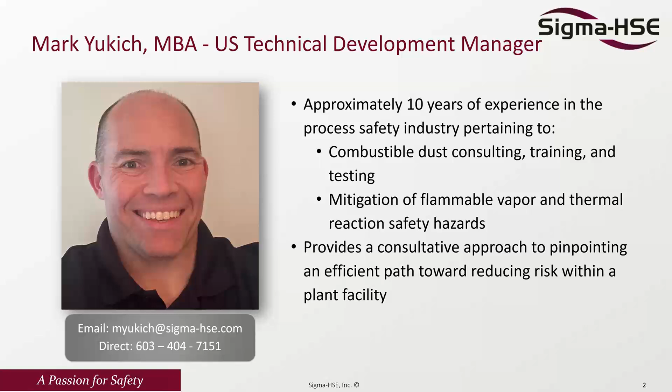Sigma-HSE is a global engineering firm with technical experts supporting companies around the world by providing actionable solutions to protect, enhance, and optimize their process. Our goal is to allow your team to focus on what really matters: protection for your people, business, workplace, and the environment. In this webinar, we will discuss Quantitative Risk Assessment, or QRA, Hazards, Risk and Safety, Chemical Handling. This webinar will explore core principles of QRA and risk evaluation, identifying chemical hazards, predicting accident likelihood and consequences, and integrating QRA into project planning and compliance.

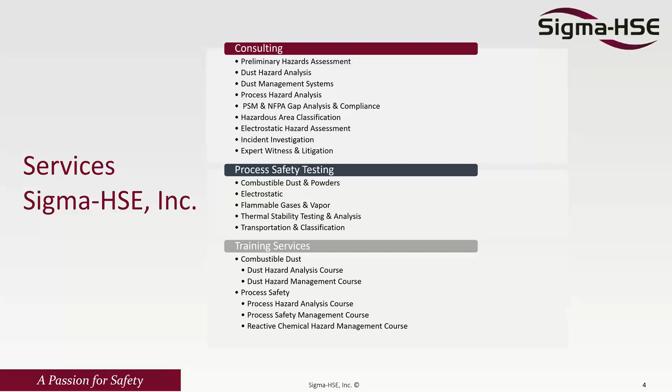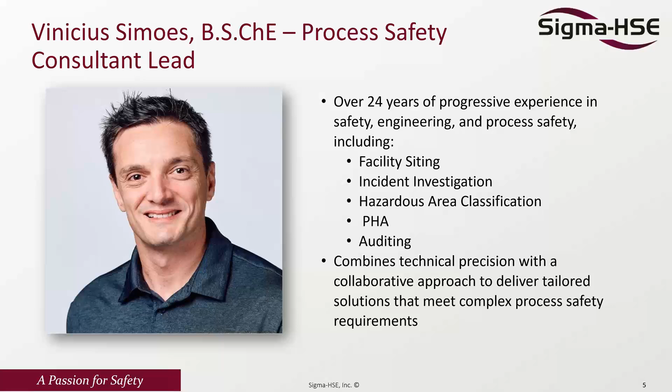Thanks a lot, Mark. I have just a quick spiel on myself. I know some of you guys have already attended other webinars that I have presented, but I have over 24 years of experience in safety, basically just out of college and went straight to process safety. Those include facility siting, incident investigation, hazard classification, PHAs, auditing, and has been my bread and butter, basically consequence modeling and QRA. So we're gonna talk a lot about a subject that I'm very dear to my heart, and we'll just discuss a little bit about it.

So the idea of today's webinar is to do a quick introduction to QRA in a nutshell. That's what we're looking for. So we're gonna talk about risk versus consequence approach, why one over the other. We're gonna talk about typical risk criteria, general methodology for QRA, and then we're gonna talk about typical QRA requirements.

What do we do? When do we do this? We do it to determine the risk to people, risk to your asset itself. So you can look into fire and explosion risk assessment, and then we look into risk reduction measurements, or basically ALARP demonstration. Other requirements that come out of the risk base, we can talk about this in other webinars, we're going to talk this further. It's escape and evacuation risk assessments, emergency system survivability analysis, risk-based layout optimization, and so forth. So this is basically what we're going to cover over the next 30 minutes or so.

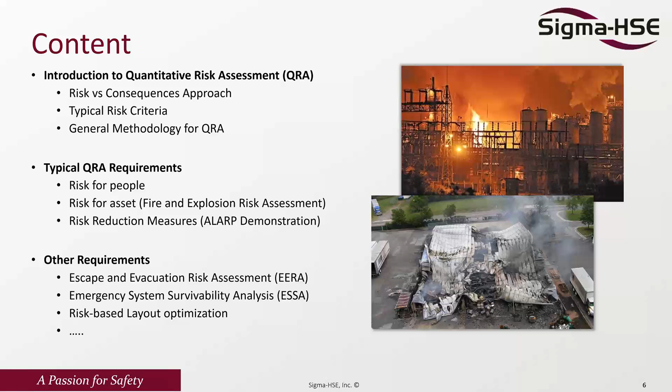So the first question is why risk? Why do we move from consequence to risk? The consequence itself can only tell you part of the story. Think about this: if I take the worst case in my facility, it's going to make a massive impact, and it's going to be extremely impactful to my environment, to the people around it, and to my asset. The problem that creates is that the likelihood of that becomes very small. So it's that one-in-a-lifetime kind of event. So we rarely design based on the worst case, right? So you look even like for buildings and so forth, there is an acceptance in there, and that's what we're going to talk about, because very rarely does this dominate the risk.

When we take the consequence approach for what the maximum credible event could be, we're already taking a bit of that risk into account. So if we mitigate our assessment based on the worst cases, we're going to end up with a very heavy expenditure. It may not be effective because when we look into the whole scheme of things, if I just take the worst case, it may not be the one driving my risk, so that may not be effective.

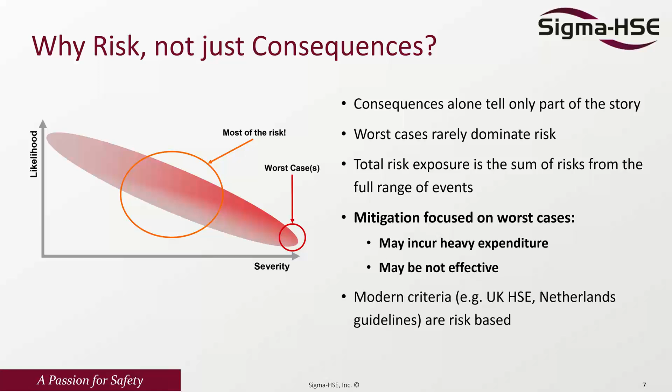So we're going to talk about modern risk criteria. A lot of countries, like the UK with the HSE, the Netherlands, Switzerland, Singapore, are driven by risk criteria, not consequence based. In the US, for example, we don't have a specific requirement to do QRAs, but OSHA requires us to do a siting assessment, and that siting can be done risk-based, which is essentially a QRA, or consequence-based. So these are things you may not have been explicitly asked to do as a QRA, but it may be something we're already using and doing.

The information I'm going to get out of a QRA is basically a location-specific individual risk per annum, those two being individual risks, basically assessing the risk to a person or a group of persons when we're talking about IRPA. And then we're talking about societal risk, or the risk for the whole society around that asset, which relates to the potential loss of life. We express societal risk in terms of an FN curve, or frequency versus the number of fatalities.

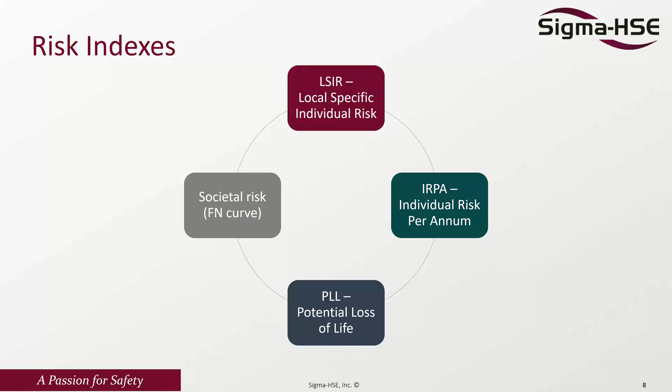So when we're talking about typical risk criteria or escalation criteria, we're talking about risk to workers, risk to others (in this case the public), and the risk of escalation - looking into one unit in my plant impacting another unit. There are different ways we address this. When we're talking about risk to workers, we accept a slightly heavier risk than when we're looking at risk to the public.

The risk to workers, mostly around the world, if you are at 10 to the -3, or once every 1,000 years, it's not acceptable. When we're talking about 10 to the -3 to 10 to the -6, or basically every 1,000 years to every million years, you're in the ALARP region, or as low as reasonably practicable - we'll talk about this a bit later. But when you're lower than 10 to the -6, worldwide this tends to be a broadly accepted region.

When you think about the risk to the public, it's a little different - it depends on the land use planning. Countries will have specific risk criteria for land use planning, for where we're planning to build a facility. They cannot be higher than 10 to the minus 4 - we're basically accepting that they cannot be higher than that. And then for residential areas, they cannot be placed within the 10 to the minus 6 range.

There is a different criteria for existing facilities versus new facilities. If you're putting in a new facility, a lot of the criteria are going to be a bit more strict because you already have the public around. But a lot of facilities were built in the 50s and 60s where there was nothing around, and then houses and buildings started popping up nearby. Then they have a slightly different criteria.

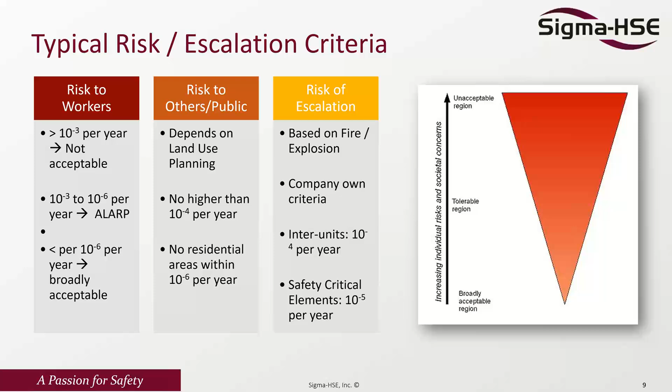So we're talking about different countries and different things - different countries will have different risk criteria.

When we're talking about the UK, for example, we're talking about individual risk and possibility of F-N curve. There are other criteria besides individual risk, like ALARP demonstrations and so on. So when we're talking about land use planning, yes, maybe individual risk criteria, but I'm looking mostly into societal risk, because for land use planning I'm looking at building around. So that's where the societal risk is a requirement.

In the Netherlands, individual risk is a must, and the FN curve is optional. When we're talking about Belgium, we're talking about both individual and FN curve. Same thing for Hong Kong. Three states in Brazil use both. And if your FN curve meets the criteria, then you're flexible on the individual risk — you may present it or you may not.

Singapore is only individual risk, and a lot of the things are related to consequence-based, so you do consequence-driven analysis. And then you can see other countries listed there.

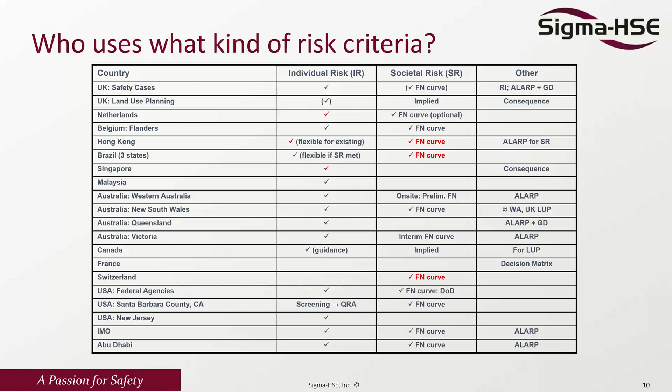In the US, where I'm based, federal agencies do not necessarily require something. Santa Barbara County is different — they do have a screening QRA for that. But the other ones tend to be, when we're talking about facility siting for example, we can use a risk-based facility siting, and there is a criteria that we present or results that we present to satisfy that. So that, in a nutshell, is some of the criteria around the world.

We can talk about 2 or 3 bands in terms of societal risk or individual risk criteria. Usually when we have 3 bands, we have an acceptable, an ALARP region, and a non-acceptable. When we have 2 bands, we usually have the ALARP region and the unacceptable region. So if you look into different countries, they have different criteria and different applicabilities.

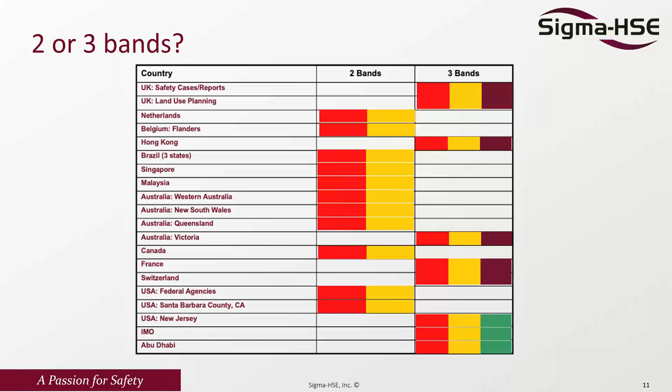Do we design things associated to that? No, we don't. So it becomes more like 10 to the minus 4, which is the likelihood that you have driving to the office, walking on the street, or having an accident at home. So when we say we're trying to do that kind of criteria of 10 to the minus 4, we're trying to keep it to something similar to the hazard of your day-to-day activities. That's basically how we got to 10 to the minus 4.

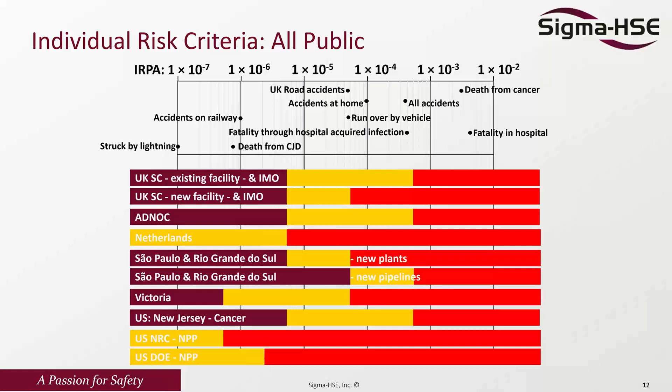And then you have the criteria for individual risk for different countries listed there. Some of them are more strict than others. The Netherlands tends to have a very strong criteria, as well as the US. Some of the others play a bigger role — there's a big ALARP demonstration region and so on, but for some others, even the ALARP is quite decent. So when we're talking about land use planning, then it changes.

Keep that in mind, back to what we did initially. What we're trying to do is have mostly an area that is unacceptable, which is the red. The yellow is the ALARP, and that purplish brownish color is where it's broadly acceptable. So that's basically what we're trying to do — this gives you an idea about individual risk and the criteria associated with it.

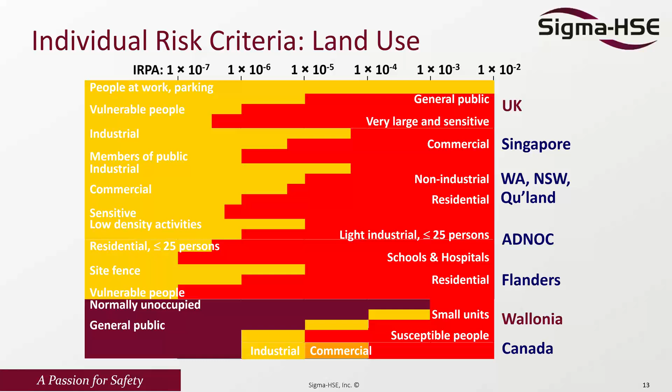On the next slide, we talk about societal risk. My idea now is to move from just a specific area or specific group of people to talking in general about all the public workers around. You can do societal risk criteria for inside your facility and outside your facility, and you'll see that some of the criteria are changing and they are different.

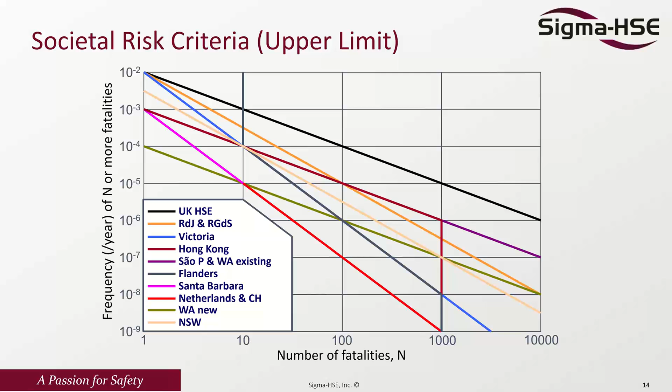One of the things I want to highlight, for example, if you take the Hong Kong curve, they do not accept over 1,000 fatalities. So no matter which frequency I'm looking at, I cannot have over 1,000 fatalities - that criteria stops there. If I have above 1,000 fatalities, I do need to address the risk because it's going to be unacceptable. Other criteria will change and depend on the country, on what tolerance of risk I can accept and what I cannot.

In terms of general methodology, it's very similar to what we talked about in the facility siting webinar - a system definition, then we define the leak scenario. So basically we first identify the hazards, then generate what scenarios or failure cases we want to assess. Then we look into the frequency, because now we're talking about risk, not consequence only - consequence and frequency combined. After that, we look into vulnerability: what radiation or overpressure is going to damage that building or create a fatality.

Then we look into background data, which becomes meteorological data, ignition sources, population - all of this as a whole. From that, we define where the congested areas are, which is important so that once we do our exposures, we're sure we assume them properly. We look into the consequence analysis combined with the frequency analysis, and with that, adding population data, ignition data, and vulnerability, I calculate the risk.

Then from the risk, I look into whether it's risk to people, a fire risk assessment, or an explosion risk assessment. Do I want to rank the risk? Do I want to see what the top contributors are? Then I can do sensitivity analysis. Then I ask myself, is this accepted within the criteria I defined? If yes, great - you can even look into other options like frequency reduction measures if you fall into ALARP and so on.

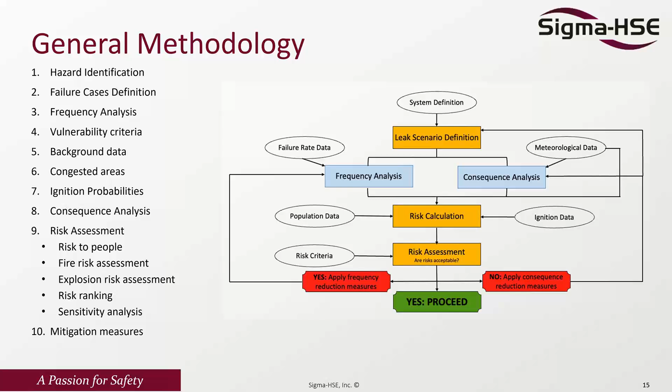But if it's not acceptable, we need to do something. Usually addressing the frequency alone won't solve the majority of our problems, so we need to go back to the consequence analysis and create reduction measures. That could be simple, like putting in a dike or bund, so if a spill happens it's contained and the pool size is reduced. It could be reducing the size of vessels - rather than one massive propane bullet, changing to two smaller propane bullets, so a damage scenario or BLEVE doesn't create a bigger impact. Those are things that can be looked into as part of your assessment.

When I think about how to do QRA modeling, I think of it in 10 steps - the easiest and simplest way to do it. First, I define the failure cases. Then I do a frequency analysis, putting that into a spreadsheet or table, however you want to do it - listing every scenario, the frequency associated, the hole sizes, etc.

Then I do the consequence modeling. I can actually iterate between those two steps - go to the Excel spreadsheet, come back to the consequence modeling, back and forth, until I get results reasonable to what we believe is correct. Then we toss in ignition probabilities, and we put in the background data, which is populations, ignition sources, congested area, and the meteorological condition.

We need to think at this point, the weather doesn't only play a role in terms of temperature, pressure, stability class, wind speed. It also plays a role in terms of direction of the wind. If you imagine we put all our congested regions, if something drifts too far out in one direction, but I don't find any ignition sources or congested regions, then it doesn't become an issue. But if it blows the majority of the time to an area where we have the ignitions and the congestions, then our risk tends to increase. So that's why it's important to have the proper meteorological condition.

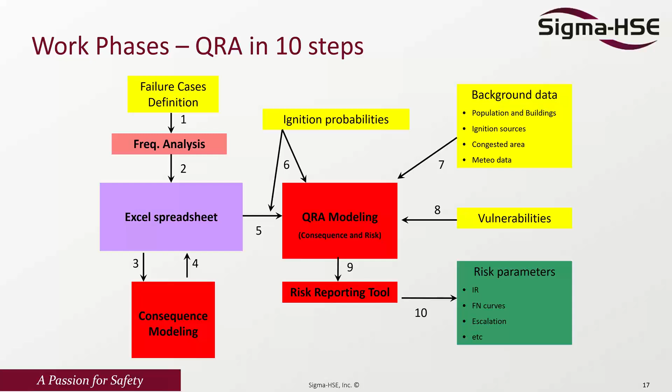So when we look into the first step, we're talking about failure case definitions. What are some of the rules? What are some of the things that we do? When do we assume that one section ends or one scenario ends and the other one starts? It can be by isolation, ESD valves, or by a flow driver, pressure - is that a pump that changed the conditions? Composition - is that a change in composition? Is that very far or very different elevations? Those can be different scenarios or different sections.

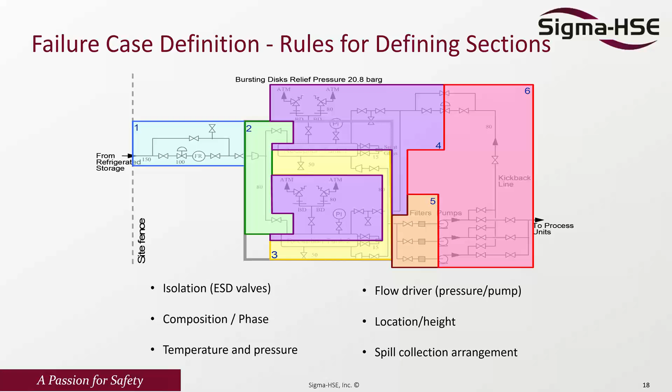Then we're talking about temperature and pressure. Massive changes in temperature pressure tends to do that. Spill collection arrangement - so if we collect most of the releases in one specific location, that tends to be a section, and then we separate that to another section. So this is, in a way, how to define it. There's different rules, there's different applicabilities. That's the one that I personally have used for the last 25 years.

So when I talk about meteorological condition, we need to get a proper wind rose. There's several ways to do it. Governments publish them, different airports will collect the data. So usually if you do not have specific data, airports nearby are the best source because they do track the wind direction, wind speed, and so forth.

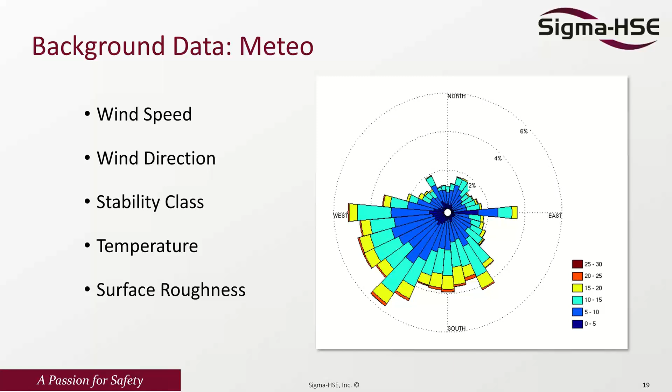I also look into stability class. That's back to that conversation about more stable and less stable classes. Temperature, and of course I need something called surface roughness, which basically is the terrain. So I try to represent the terrain in a way that allows me to reproduce what the terrain will be. If we're looking into a CFD model, for example, we do not need the surface roughness because we put the elevations, we put all the obstacles on the way. Our way on this empirical world or the QRA world is to try to reproduce what that would be and include that in there.

So the other information is that we need to put ignition sources - background ignition probability, the ignition areas, is something that we always do when we look into societal risk. One thing to highlight: if you're talking about the Netherlands, they don't assume strong ignition sources. All they ask is that you assume the whole area is a possible ignition with a certain percentage. In other countries, if you don't have a specific requirement, we use not only the background ignition, but also strong ignition sources like furnaces, open flames, flares, hot oil systems, thermal oxidizers, truck loading areas, roads - places where you can have ignition.

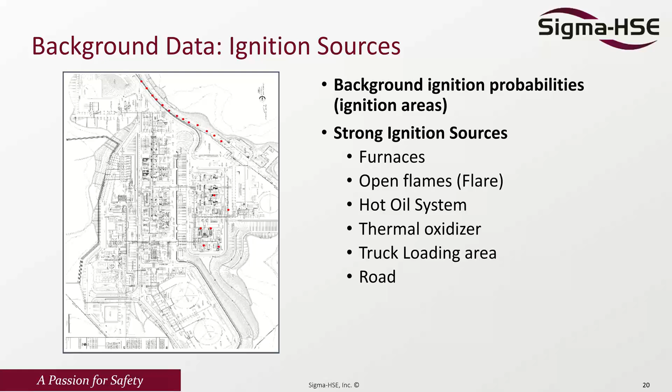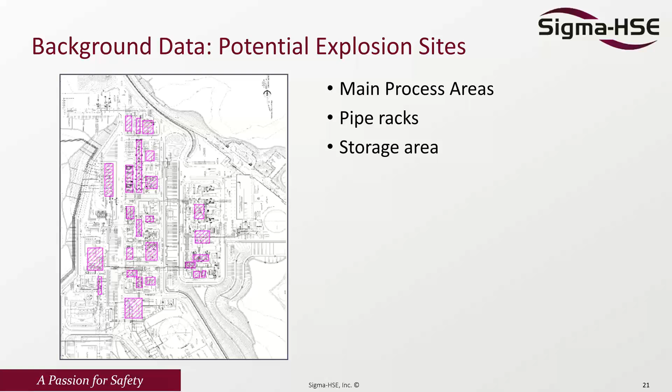Besides the ignition, we need to put the potential explosion sites or potential explosion domains. You guys may call them PEDs, PES - there's so many terminologies for that, but basically it's congested areas. Where can I have enough acceleration to the flame that will generate an overpressure? If I just burn a cloud in the open, most of the clouds will just burn as a flash fire. When I toss congested regions into the mix, those obstacles accelerate the flame enough to generate an overpressure. That can be process areas, pipe racks, storage areas - different areas that I will have that.

In addition to the PEDs, we also need to do population. If we're going to do societal risk, we need to put population, and then define where they are - indoors and outdoors, day and night. Different vulnerability, right? I can have different vulnerability for different buildings. One building, the control room, is going to be very different than an administrative building in terms of construction of that structure. And we're talking about the process area, people distributed around the process area, control buildings, admin buildings - what is it that we have?

One other thing that population adds to it is an ignition probability. A person can be an ignition probability in a very simple way - you flip a switch, that's a possibility of an ignition, right? So all of this is things that are there.

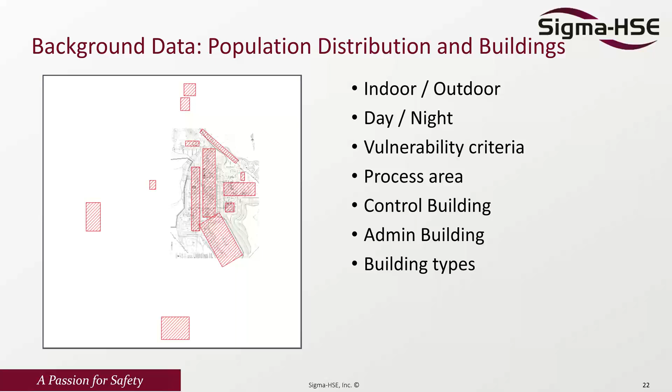Once we combine all of this, we need to come up with vulnerabilities. There's different sources of vulnerabilities. One of the big ones, widely used, is the TNO books. We have 4 books, 3 of them are the main ones - the yellow, the green, and the purple, which had those colors. The latest, the purple, they changed to the BEVI guidelines for risk assessment. So it's not a color book anymore, but it's still widely used for vulnerabilities. Other things we use are 752, which has vulnerability of buildings due to explosion events, and OGP - the oil gas producers in the UK - they have a probability or vulnerability table for plants and structures under this link.

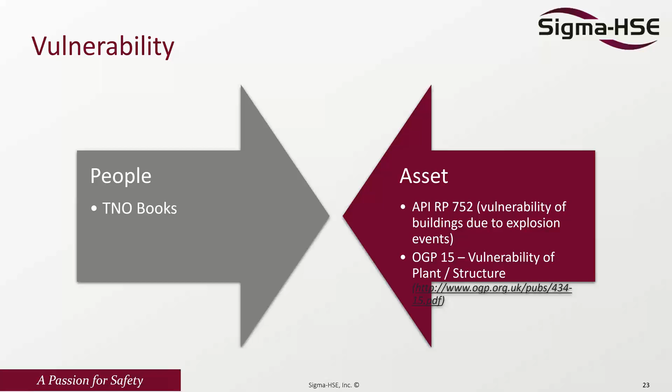With all of that combined, then we get to calculate our risk. The way we export or present our risk is by the individual risk. When we look into the risk to workers or public, we're talking about, let's say, a 10 to the minus 6 per year that exceeds the plant's boundaries - so it becomes a risk to the public, and that's something we need to look at. The individual risk for workers, for example, in this study, was 10 to the minus 3 to 10 to the minus 4.

So it was within the range that we accept, depending on the country, of course. The individual risk per annum is by worker group - you can put maintenance crew, operators, different ways to actually present it, and then you have different results for each.

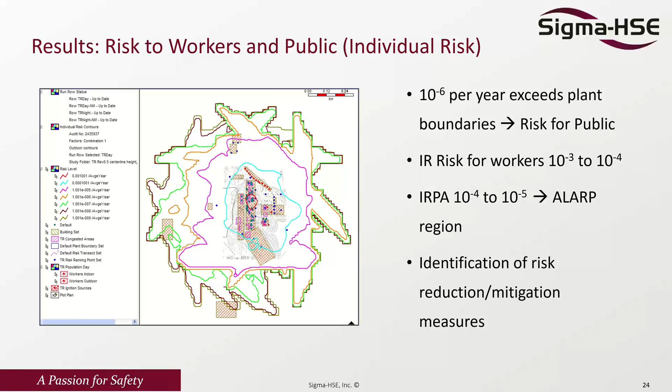The other thing is we can use this to identify risk reduction measures and see what the impact will be. So when I look into risk of escalation, I'm looking, for example, at the impact from one unit to another, or the impact on an administrative building, the impact on a control room. Are they designed for this overpressure? Are they designed for this accidental load? All of these are things we consider.

For example, if our criteria is 10 to the minus 4 to 10 to the minus 5 per year, this criteria will cover a large area of this plant. If you see the 10 to the minus 4 and 10 to the minus 5, that's the blue and the magenta colors in there - so that's basically what those are.

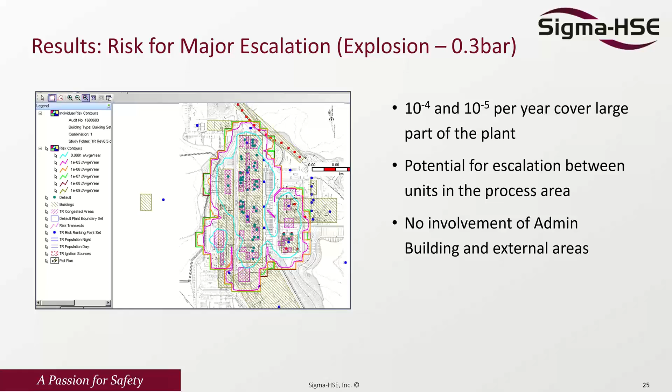We have the potential for escalation between units in the process area. The good thing is there's no involvement of the admin building or external areas for this escalation. So if all my buildings within that area are designed to withstand 0.3 bar, we're okay. My only issue would be if we go beyond that point and look into other areas.

When we're talking about minor escalation, or the 0.1 bar, the majority of buildings will be designed for it - you may need to make corrections to windows and little frames, that kind of thing. They will cover the majority of the plant, yes, but it involves on the criteria of 10 to the minus 4. We will reach the admin building, and the 10 to the minus 4 to minus 5 extends beyond the plant boundaries. But again, this is just a minor escalation - I'm not terribly concerned, not terribly worried, because if you look, it barely gets out of the boundary. So it's not something extremely bad.

The other thing I can do, in terms of results, is put what we call exceedance curves.

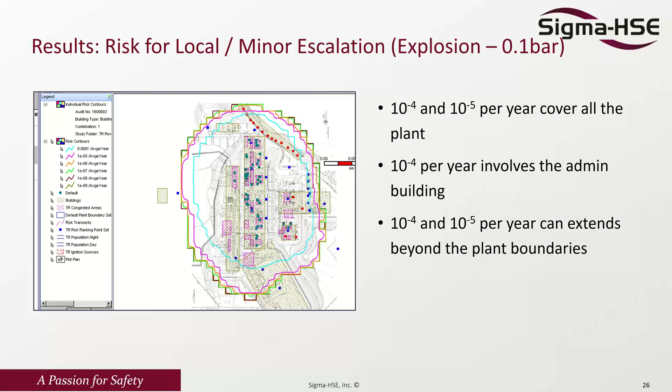So I can look into the exceedance curves in terms of different equipment, for different buildings, and then do the design accidental load for the 10 to the minus 5 and 10 to the minus 4. The important part is defining what the criteria and acceptance is for our risk. For example, in the admin building, if 10 to the minus 4 is my criteria and I have 0.13 bar, that's accepted. If I was going to the standard of 10 to the minus 5, it may be flagged because that's over what the design load was. And then you give that input to the design.

So we can do the QRA in several parts of the process. We can do it really early in the design. I've done plenty of them in pre-feed, even early feed, so you can get very good inputs for design. And then you can do them to check everything at the end, when you get to the detail engineering part. So that's important.

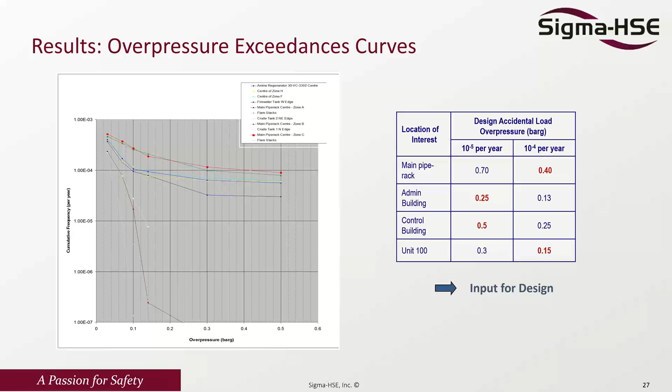Once we determine which scenario has unacceptable risk, one of the things that really helps us is determining the top contributors, so we know which scenarios are the drivers for the risk. With that, I can make a better approach to determine what they are. If you look into section 9 of this study, for example, the large and the rupture scenarios, if you add them up, they're about 25% of the risk. So that shows they are high contributors to the PLL, or potential loss of life.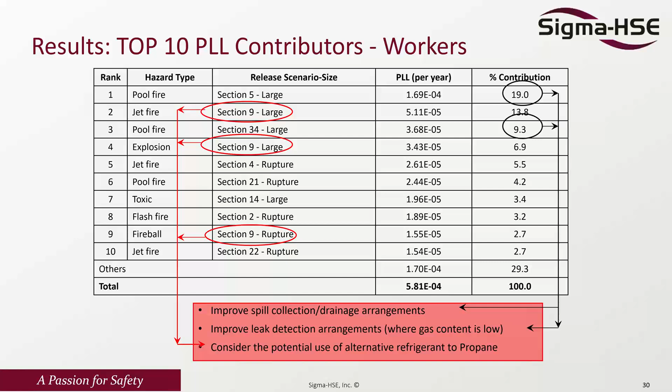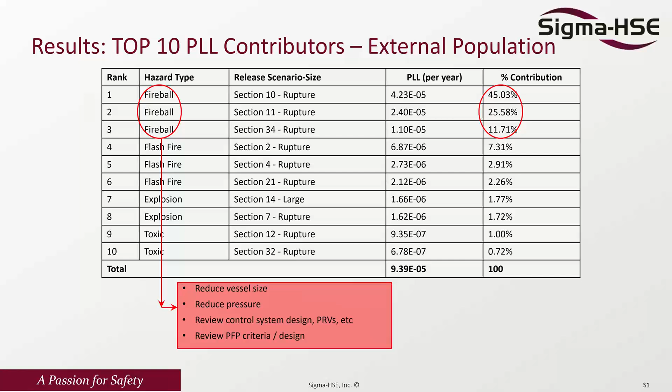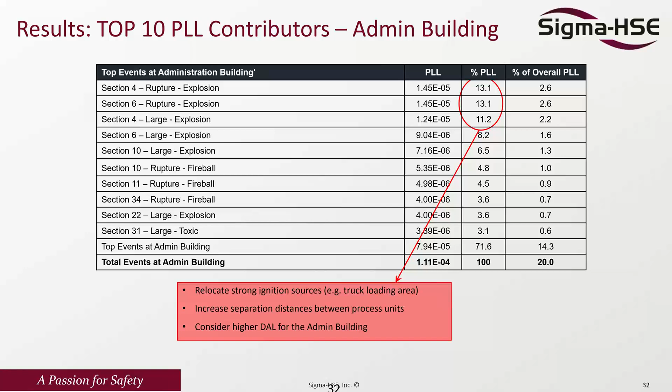The top 10 contributors can be done as well for specific buildings. So we look at exactly the risk, which was explosion, by a couple of different scenarios to the admin building. We can relocate strong ignition sources, put the truck loading area a little further out, increase separation distance between units, or consider a higher design accidental load for the admin building. All of this helps us determine recommendations, things that come out of the study that we can address to make it better.

So in the end, what we try to do for you as a project is be sure that we're with you every step of the way - covering you in pre-feed or even concept selection phases all the way to detail engineering. It's important that you determine the risk and the high drivers for your risk really early on so you can actually design for it. Our consultants have over 30 years of experience in this area, so it's quite a massive undertaking that we have.

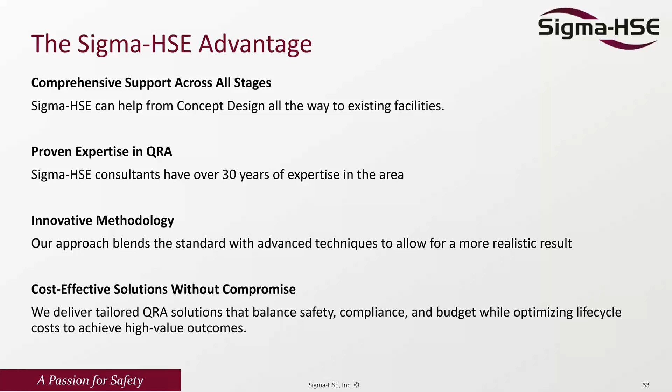We have our innovative methodology, as mentioned on the facility siting webinar. We combine some CFD with empirical models to get a more realistic result and less expensive solutions. And then, of course, we look into cost-effective solutions, trying to deliver a balance of safety and compliance within the budget that the client has. So this is some of the things we try to achieve.

And then with that, I'll open it up for questions.